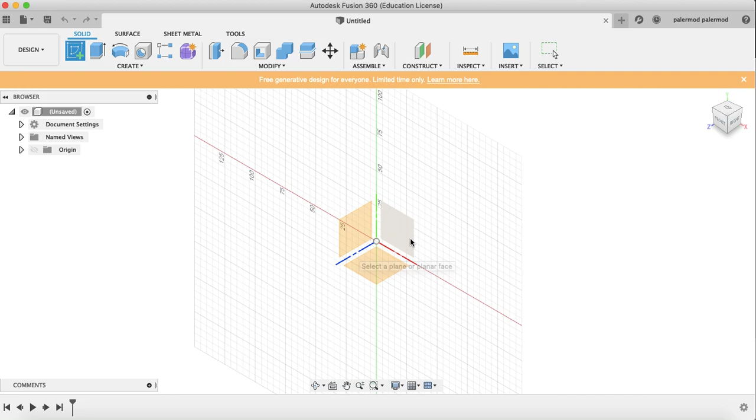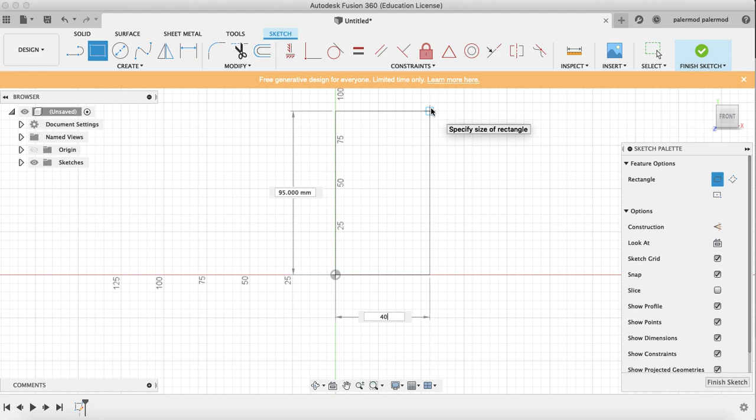First, create a new sketch. I'll go fairly quickly here. Choose a plane to draw on and draw your rectangle, which is supposed to be 4 centimeters by 17 centimeters, but since I'm in millimeters, do 40 by 170 instead. Then adjust your screen so you can see the whole rectangle.

Start to draw your blade within this rectangle. I'm going to show you how to use the spline tool, since you might be interested in using it for the blades. I'll just draw something simple. It works a lot like the arc tool.

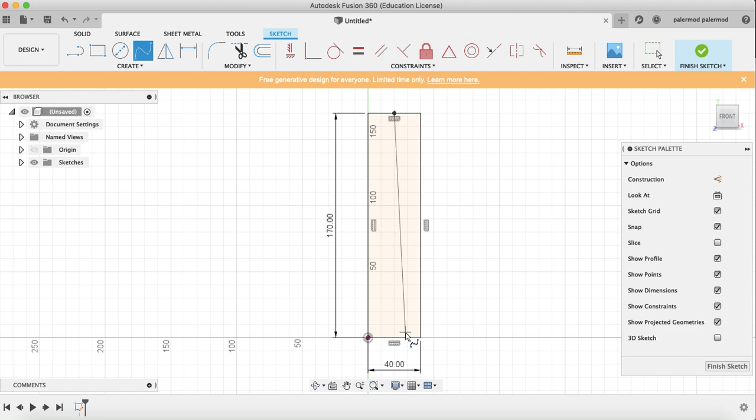I'm clicking here, remembering I'm drawing within my 40 by 170 rectangle, maybe about there, and dragging this out to the edge of my rectangle. Right about there. Hit the check mark when you're done.

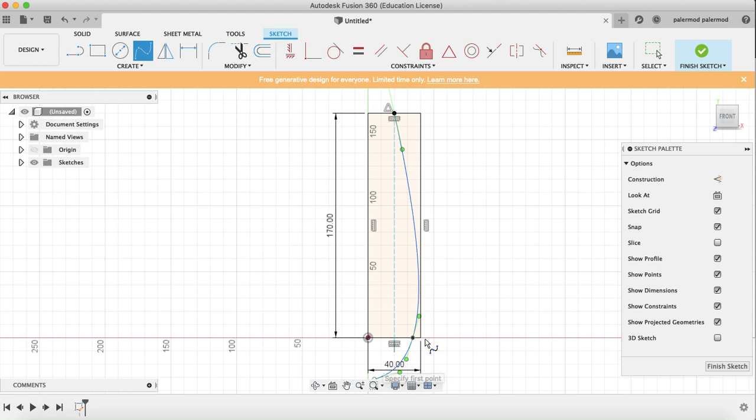Now I have this extra part that I can trim off if I hit T on my keyboard, or hit trim up here. I can trim that off.

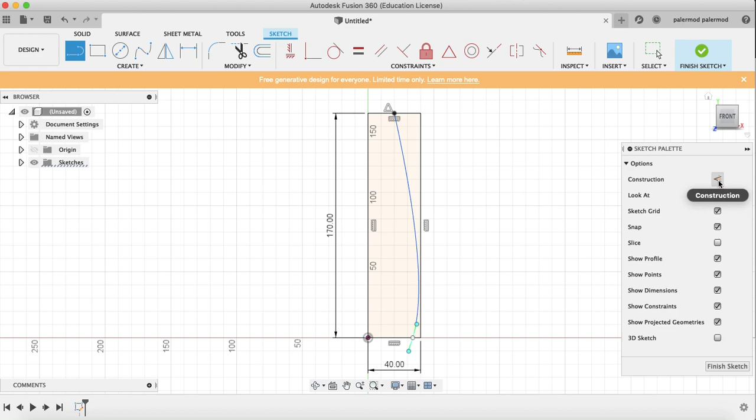Now I can mirror this curve I've drawn onto the other side if I draw a mirror line. I'll draw a mirror line using my construction tool, right down the middle. There's my mirror line.

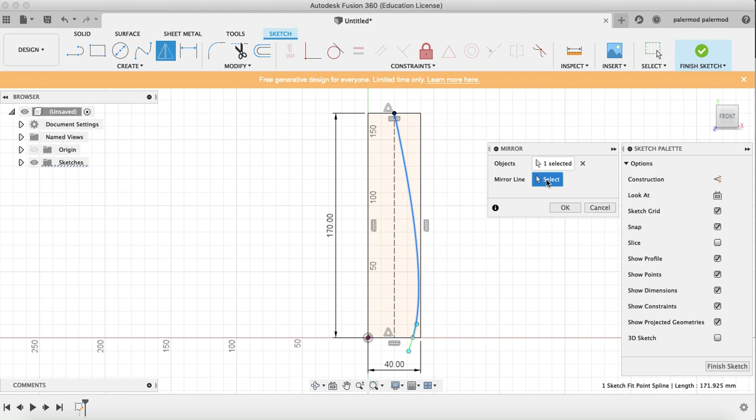When I go to create mirror, a window pops up. I need to select the objects I want to mirror. I'll select this, and my mirror line will be the construction line I drew. There goes my reflected curve.

Hit OK. Now I'm ready to extrude this, but first I'm going to trim away the rectangle I created. I'll hit trim again to remove all the extra lines showing here.

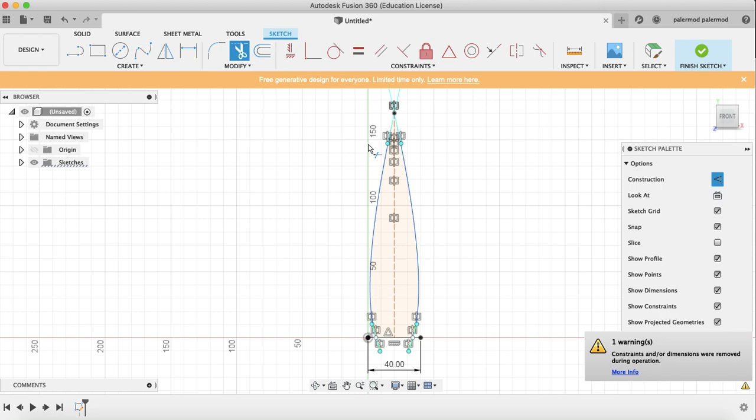You may need to zoom in. There you go. You've got just a real basic blade there, which I'm now going to extrude.

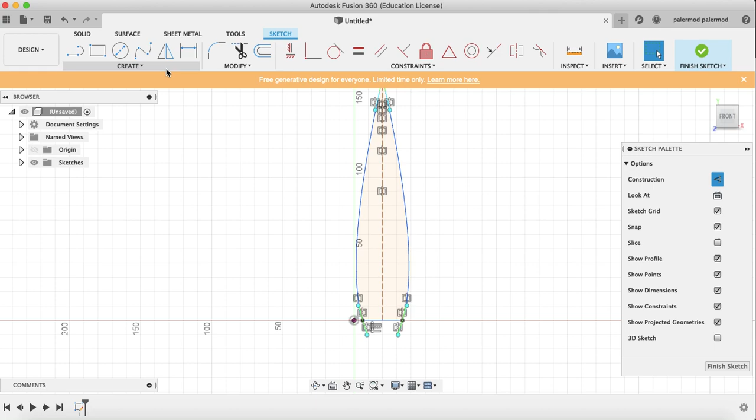I can hit E on my keyboard to extrude. I'm going to extrude it 2 millimeters right now, but you'll be doing either 1 or 2 millimeters. If you're using just one sheet of cardboard from your cereal box, it'll be 1 millimeter. If you're using two, it'll be 2 millimeters. I'll do 2 now so you can see the extrusion better.

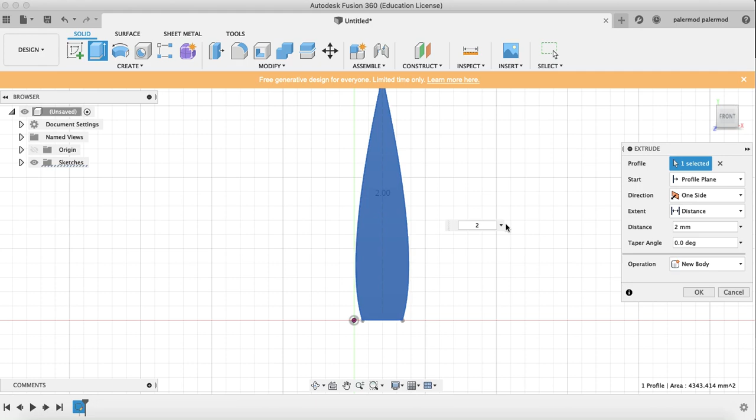Hit OK. Go to my 3D view. There's my blade. Now, to create my actual drawing with dimensions, I'm going to switch from design view to drawing view.

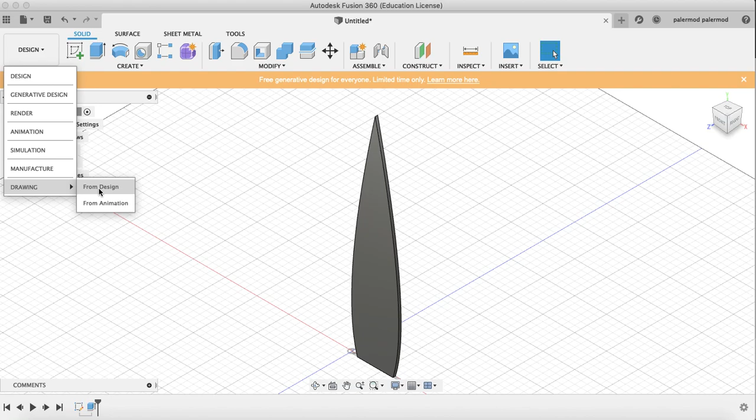It's going to ask you to save it. So create a new project called Windmill, which I've already created here. Double click that and call it something. I'll call it Test Blade 2, saved in my Windmill project.

Hit save, and you'll see this window pop up on the right saying to create drawing. We're going to keep everything the same except for the sheet size, which we'll switch to A4.

If you do 210 by 297, you can see we have two options for A4 here: 210 by 297 and 297 by 210. All that means is one is portrait and the other is landscape. I'll go with the portrait version, that one there, and hit OK.

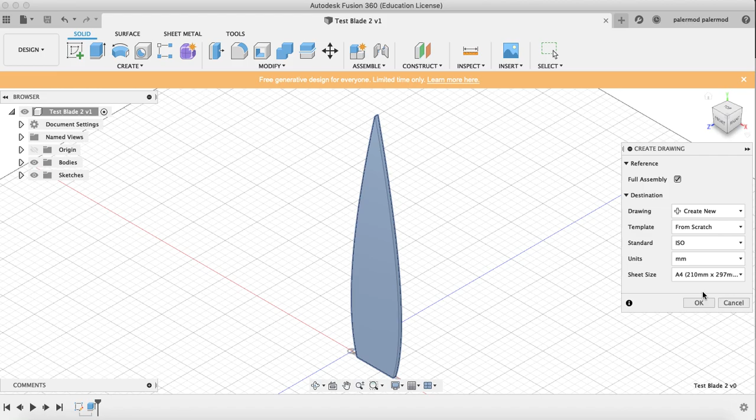What you might find at this point is that the computers in this lab start to bog down and slow down. We'll have to live with that, and hopefully it doesn't freeze up to the point where it shuts down Fusion. We'll deal with that if we come across it.

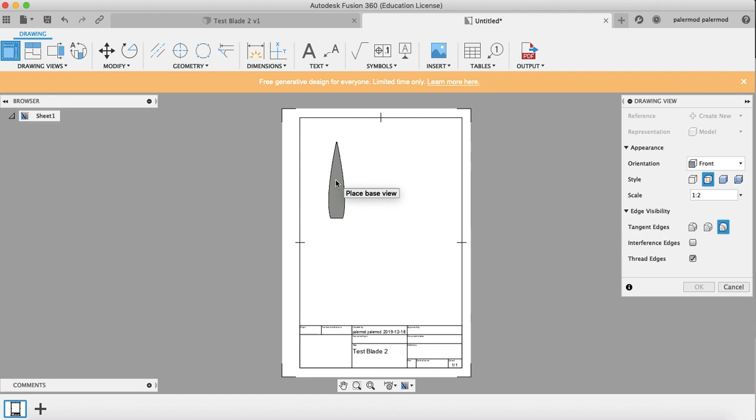You can see now it's asking me to place the base view, or the front view, of my blade. Before I click to place that, I'm going to change my scale here to be 1:1.

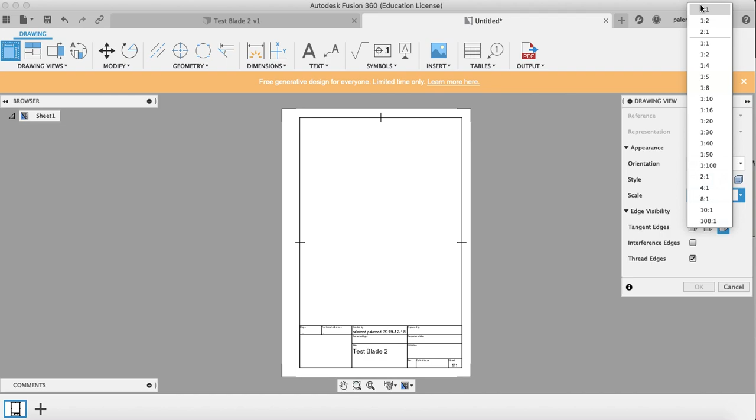You can see it's pretty big there, so set it to 1:1. Now it looks all blurry, but once it generates the view, it should straighten out. We can now hit OK.

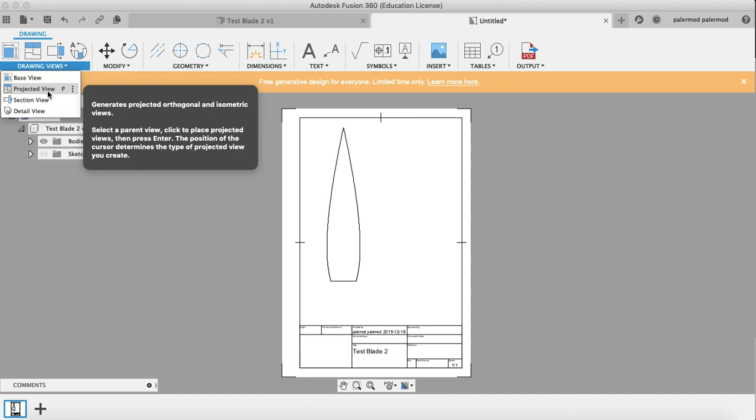Now we're going to draw the side view to show the thickness of our blade. I'm going to go to Drawing Views and select Projected View. It's asking what view I want to project, and since I only have this one view, I'll click on it.

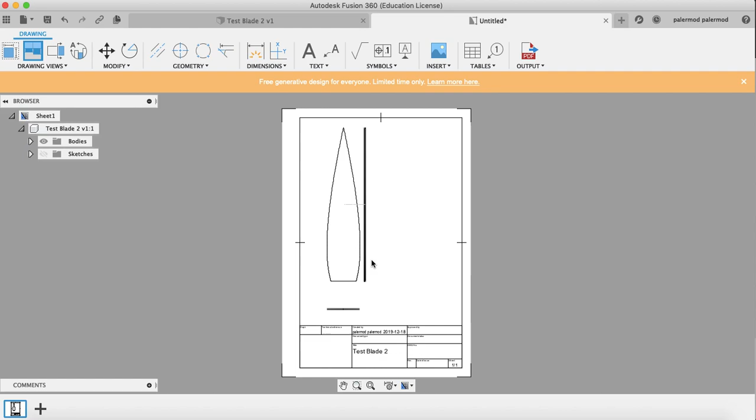Now I can project down and show the thickness of my blade, which we will dimension. If I drag my mouse at an angle, you can see it'll actually create a 3D view of my blade.

I'll drop it here in the bottom corner, but move it up to the top right corner. I'll click there. It's going to want to keep placing different views, but we don't want to place any more, so that should cover it. Hit Escape on your keyboard.

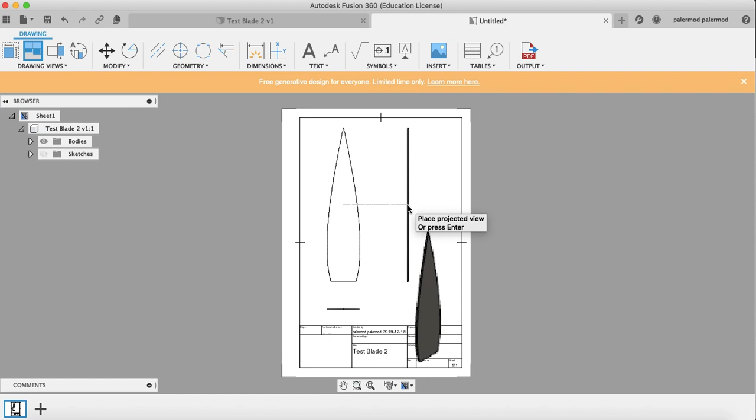If I wanted to edit this particular view, notice these are kind of white on the inside. For my 3D view, I want to actually make a solid figure, so I'm going to double click and change my style to be shaded. Hit close.

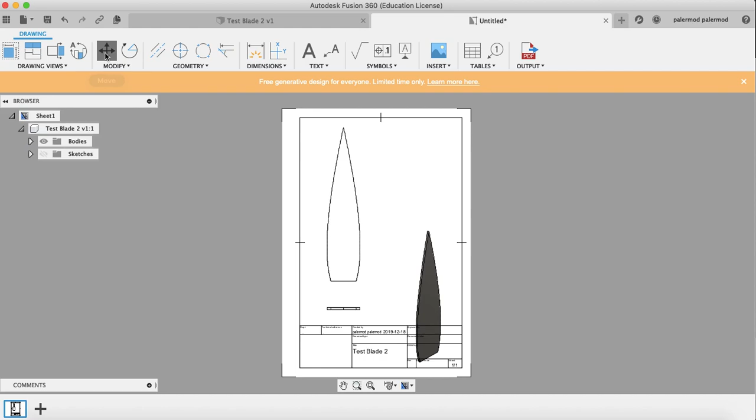Now we're going to use the Move tool at the top. It's asking what I want to move, so I'll select that view, click on the transform icon, and I can move it wherever I want. At this point, you may find your computer lagging and going slow.

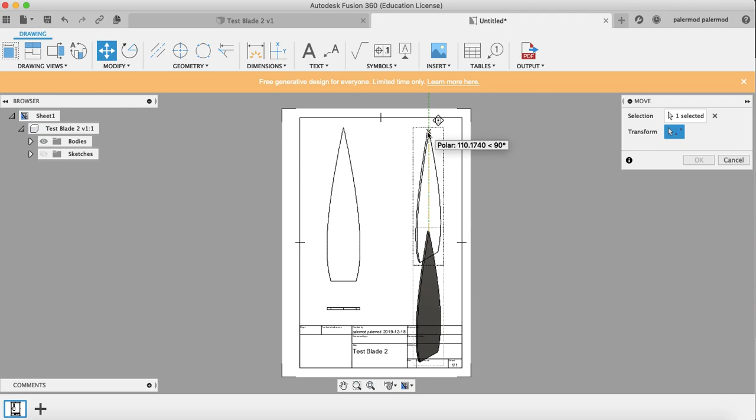Hopefully it's not too bad, and hopefully we can get through and make this drawing without Fusion shutting down on us. Once you're ready to drop it where you want, just click and drop.

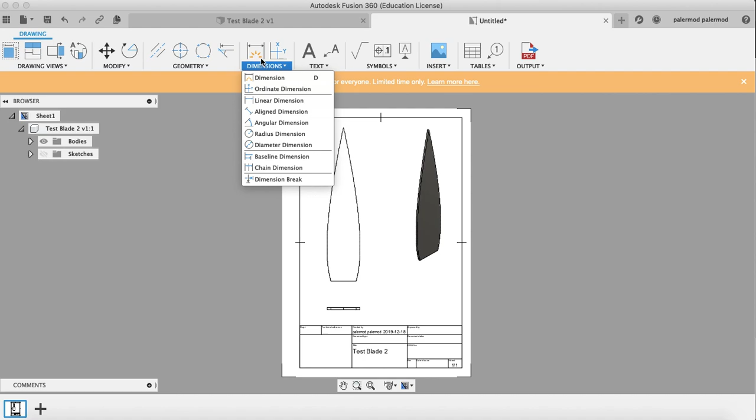Hit OK. Lastly, we're just going to dimension the overall size of our blades here. I'll hit the dimension tool and click on that corner, and you can see this should end up being 170 millimeters, and it is.

Click for the dimension to stay in position. I'm also going to dimension from this corner to this corner. It's about 28 millimeters. I know out here it's closer to 40 millimeters, which is what I'm looking for, but that's okay.

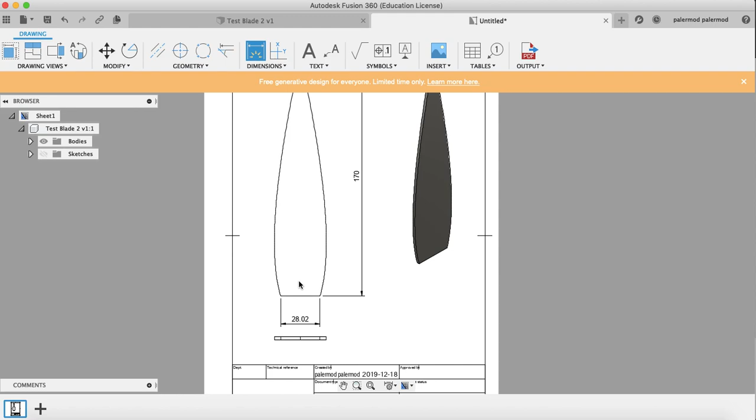We'll just show that dimension there, it's not a big deal. Lastly, I'm going to show the thickness here, so I'll zoom in a lot and click on that corner to this corner, and that should be about 2 millimeters.

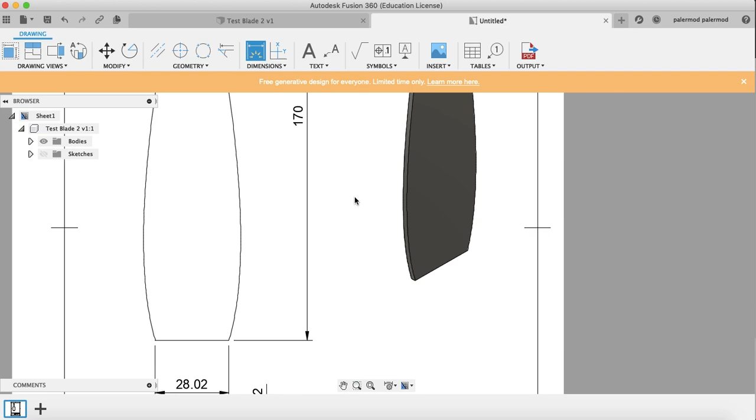And that's it. You have created a real basic drawing here, showing a 3D view, a front view, and a side view showing the thickness.

I also want to show you how you can easily edit this, which is called your title block here. All you need to do is double click in the fields.

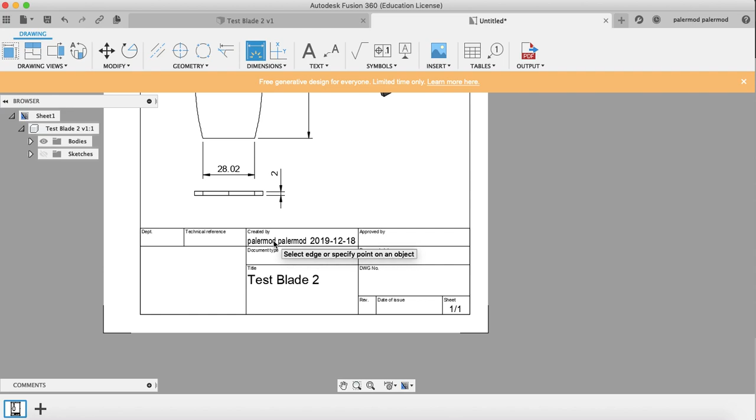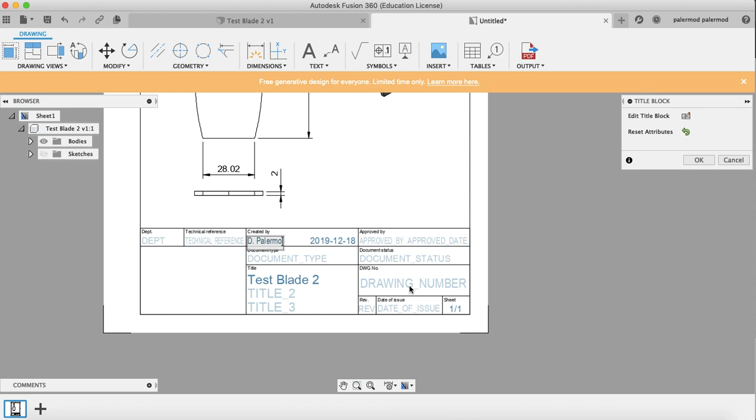Escape from my dimension tool and double click into the fields here, and you can edit your name, the name of the part, who it was approved by. You don't need to put anything there. Then hit OK when you're all done.

All right, so there it is, there's your drawing file, and this is in a 1-to-1 scale, meaning you're going to print a version of this, cut out your blade here, and because it's a 1-to-1 scale, you'll be able to trace that onto your cereal box and cut it out just from tracing that.

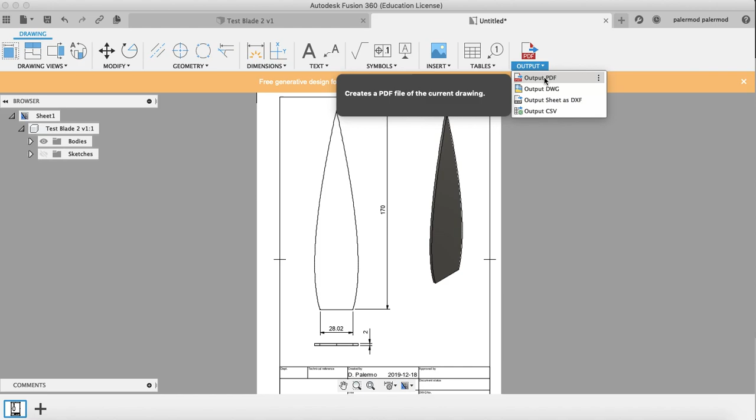But before we do that, I want you to create a PDF version of your drawing. In the right corner here, you'll see Output. Just click on the drop menu and click on Output PDF.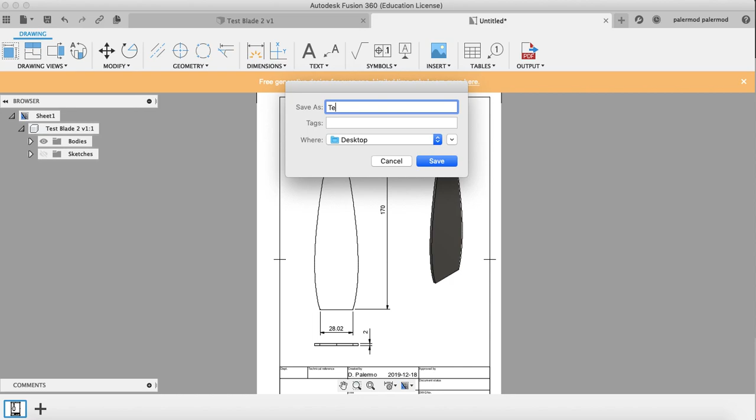Press OK, or actually let's just choose the current sheet here. Press OK. Now it's going to ask you what you want to save it as and where you want to save it. Make sure you save that to your H drive and save it as whatever you'd like.

Again, Fusion might be going pretty slow, so please just be patient with it, and hopefully we're able to get through it without too many hiccups.

Okay, so you've now created your PDF file, which you are going to insert into your journals that you're going to submit as your final sketch.

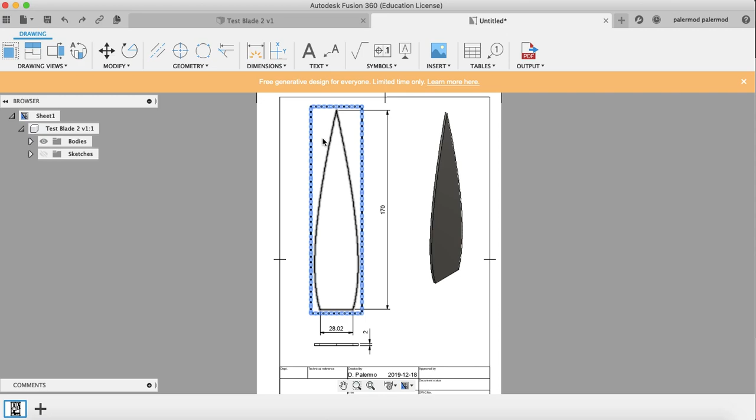But you're also going to print this version that is up on your screen here. You're going to print this, and that's going to be your 1-to-1 scale version that you're going to cut out and trace onto your cereal box. So just to print it, simply go to File, Print.

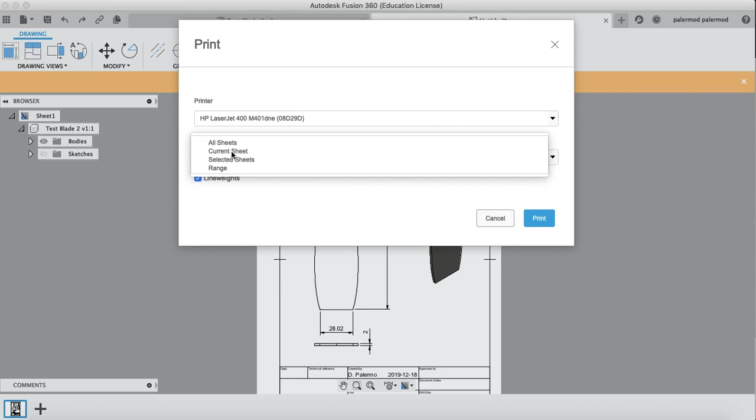It's going to ask you which printer you want to print to. The printer here will be either room 304 or room 223. For selected sheets, just choose current sheet, then hit print, and it should print out a 1-to-1 scale version that you are going to cut out and use as a template onto your cereal box.